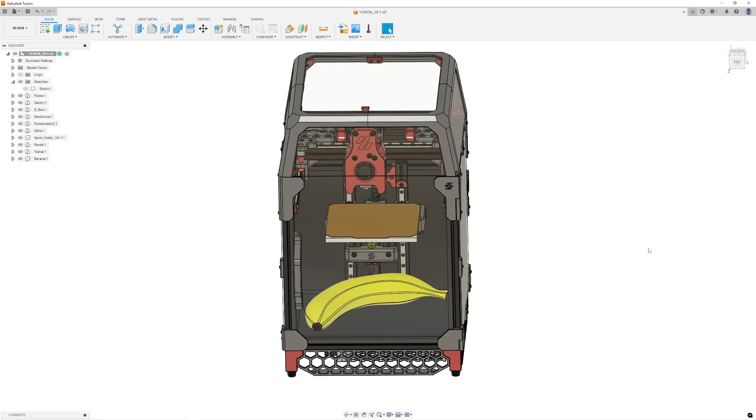So to have it in subassemblies and make it very logical for a build house or for kits or for manufacturing to be able to figure out how to assemble it, and to segment the BOM by kitting up the BOM, allowing you to find these parts very easily and build each subcomponent easily and then integrate them together by however you decide to segment the different portions of the subassemblies, where you have one start and one end. Okay, here we go.

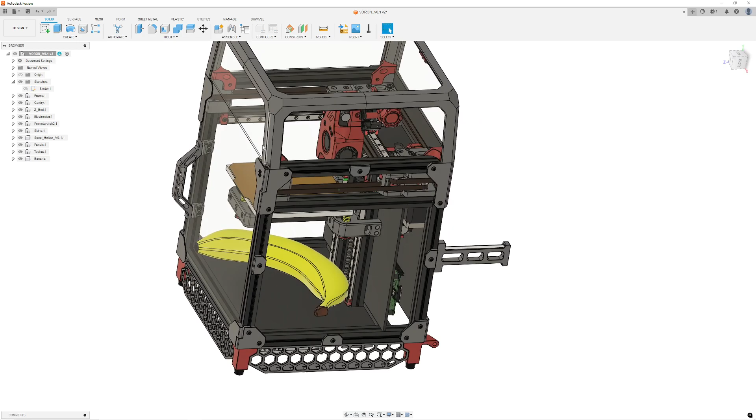Here's the Voron 0.1. This is not the latest version. I think they're on 0.2. I have one of these Voron 0.2s, and now it doesn't have this assembly like this. It's now square. It's got a square cap on it, and so it has another rail here with the lock segment. So I'm going to use the mouse in my right hand, and I'm using a 3D space mouse from 3Dconnexion on my left hand.

So let's go ahead and go over this. Pretty funny, they got a banana in here to show the size. Very, very small printer for a comparison. Obviously, you can go up here and inspect. I think it's only like 6 inches wide by 6 inches wide by maybe a foot tall or something like that. So let's go ahead and look at how they do the BOM compared to that robot arm, right?

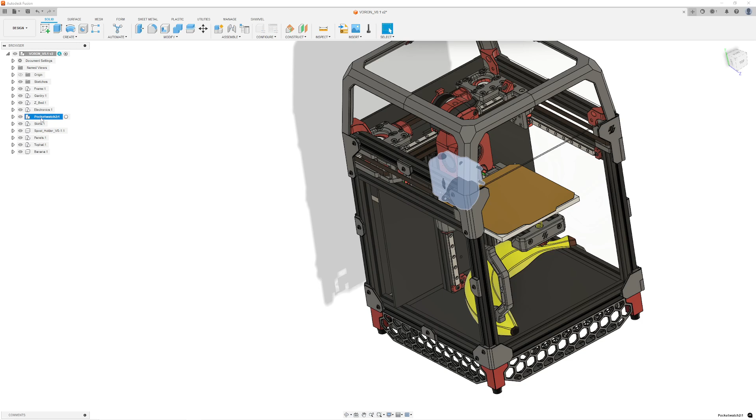So the robot arm, it has component by component. So here it looks like they're kind of doing a mix. So here we have the frame components. So this is a kit, and so they have instructions. The instructions for the kit are very, very well done. I would say that this is one of the instruction manuals that you can use as a guideline to develop your own user manual for either build, manufacturing, or however you want to do it.

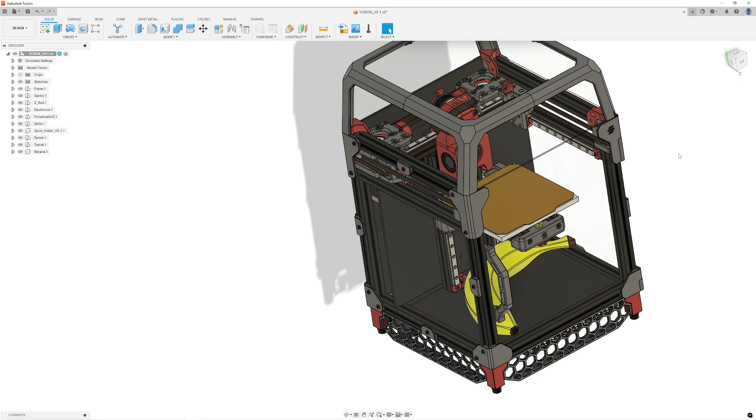So obviously for manufacturing, you're going to need to have some sort of procedure that is locked in with all the specifications, torque values, dimensions, all these things that need to be correct, as well as testing. So did it pass QA, quality assurance? Did it pass that QA testing to be certified that this is most likely going to work? And then when you ship it, the chances of you having problems come up are way less likely.

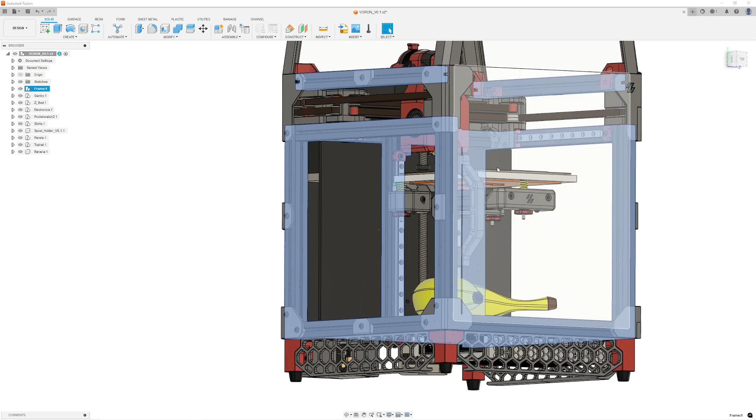So, how you build it is generally you build it by the frame, including these rails. So this is kind of step one, which is interesting on the build. And I've built mine fully, haven't got it up yet because I have a 0.2 and I believe the hot end was bad, so it died kind of instantly. So these components are generally built first, the frame, and then this back section in here is built before you close it in. So generally the frame and the gantry. And I think also the gantry is kind of built separately.

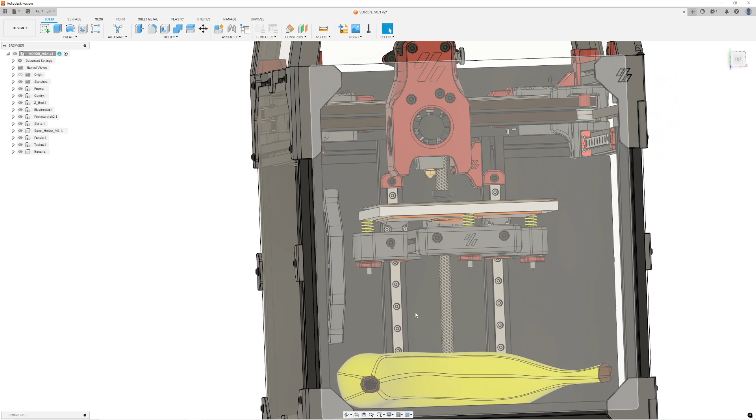Another thing that's built in here is, if you see this bolted here, the Z gantry. So I think here the Z gantry is there. And then you have the Z bed, or this is the Z gantry. And then the limit switch is up here. I think the limit switch on mine's in the bed. I can't remember. But I have the sheet metal bed, not the aluminum extrusion bed, the upgraded bed.

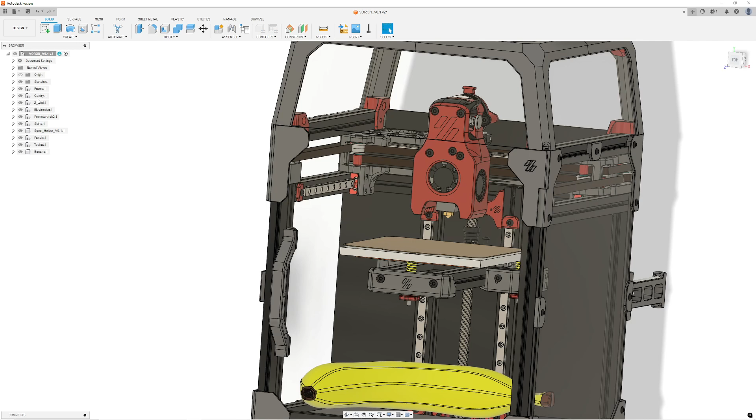So basically how they have this built is in the subassemblies. So it doesn't look the same as the arm because these things are kind of inside each other, while the robot arm is the easiest to see because it has these different links that are sequential, right? Joint 1, joint 2, joint 3, joint 4. There you go. This one is a little bit more complex, but you'll actually find.

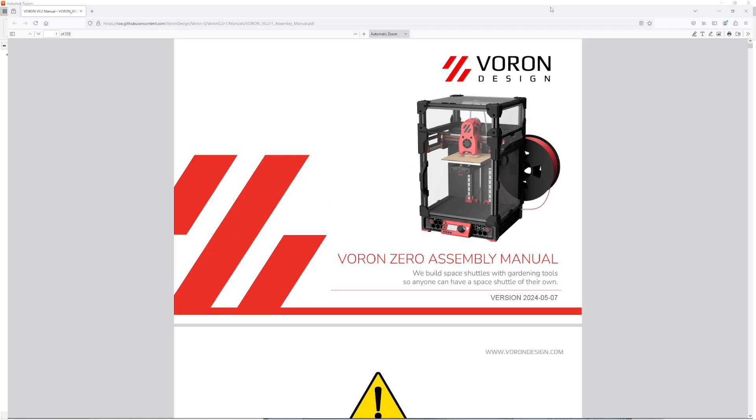Let me actually get the manual real quick. So we're going to go printers, Voron 0, and again, Voron 0.2. I downloaded this a long time ago. So let's go ahead and look and see how their subassemblies work. So again, this is a very, very good reference.

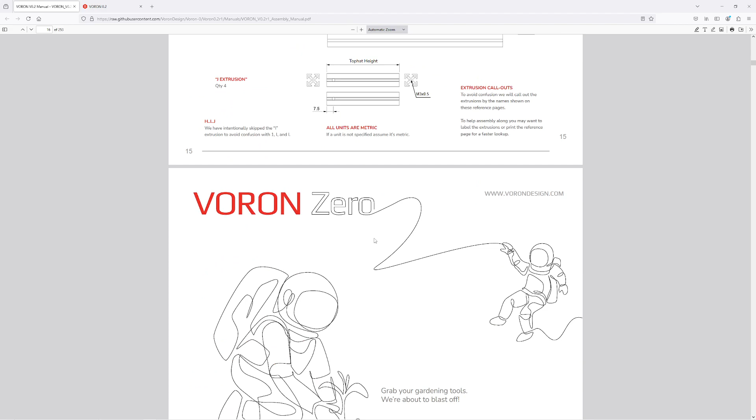Voron's website is here. You can see vorondesign.com. So here it has all the things, and you see here the very first thing. Again, this is 0.2; what we have there in the video is a 0.1. So it's showing you the subassemblies that you're going to build.

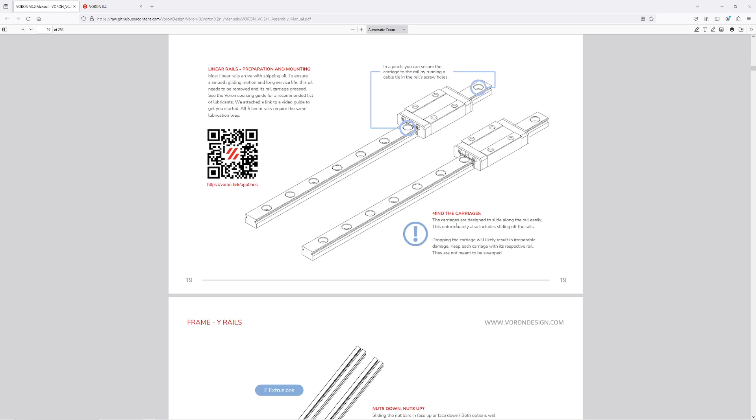So you see here you're building the frame first, and then you're building the z-axis. Now I had the sheet metal version, not this version, but a lot of these are going to be the same between version 1 and version 2. But you see here they're building the first two sub-assemblies. One is the frame and the next one's a Z bed.

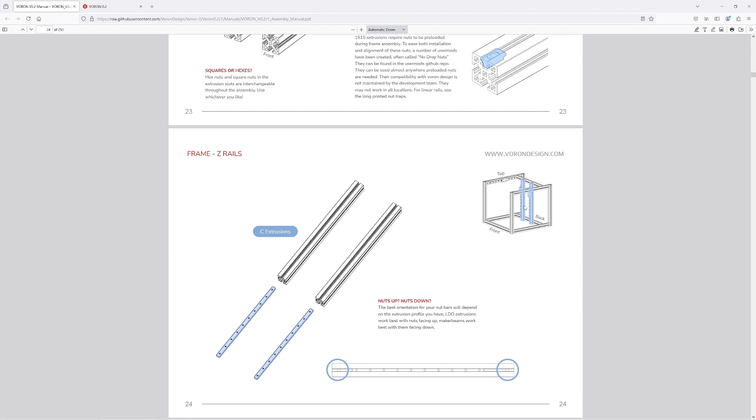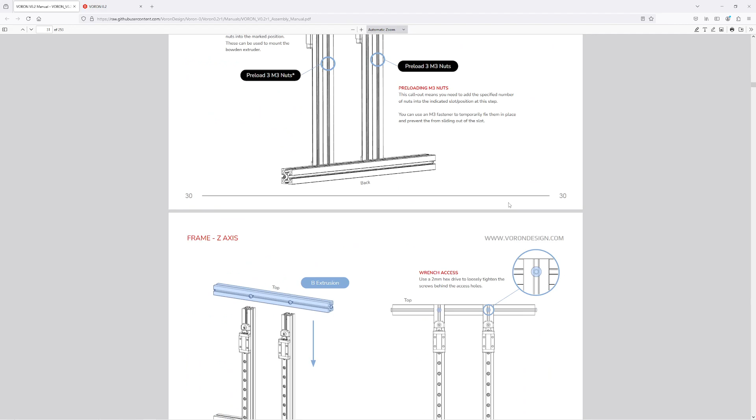Now they're kind of building them at the same time. So you see here they built the Z bed first, and then they're adding this kind of horizontal portion of the frame. So those are the two different parts that are interacting with each other. So maybe that should have been counted as the z-axis, the z-bed. And so there you go.

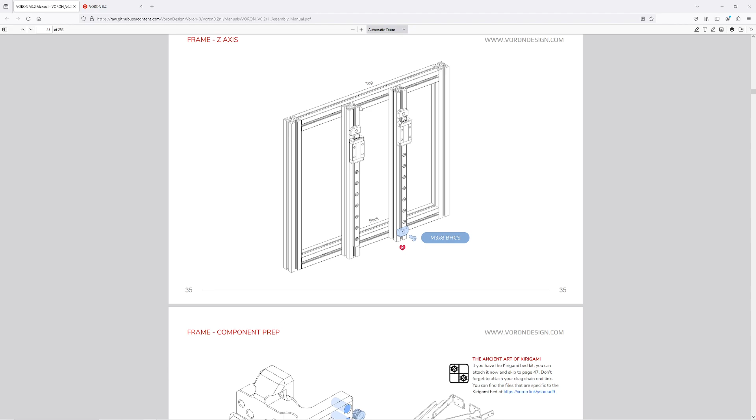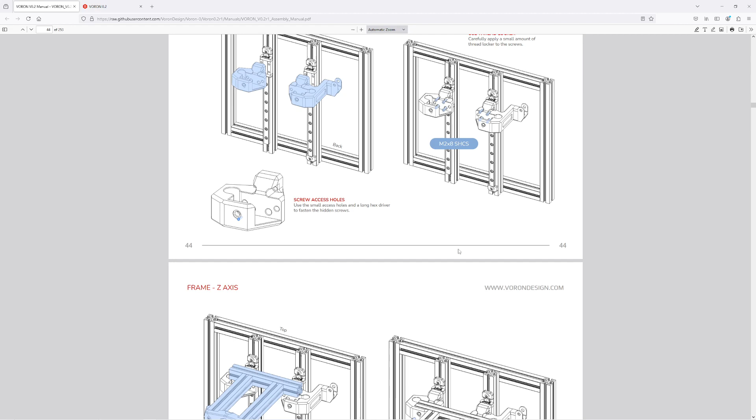Now you have a nice, good separation. Because now they're going right. So this is the one I have, the Kirigami sheet metal, this one. So now they're going directly into the z-bed sequentially. So you see the BOM is sequential to the actual assembly.

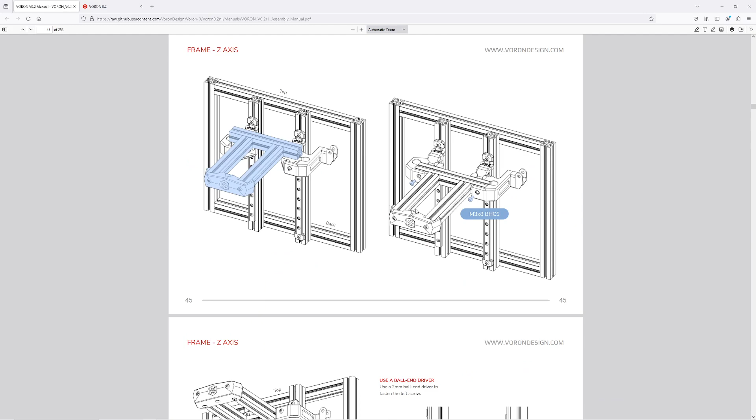And there was that one part that I don't agree with. This part shouldn't have been part of the frame. I think that should have been part of the Z bed, same as on the bottom. So you saw there, if I highlight the frame, the bottom there. So I think that should have been there. Obviously they're doing this just to call it that. So I guess it depends on how you want to segment it.

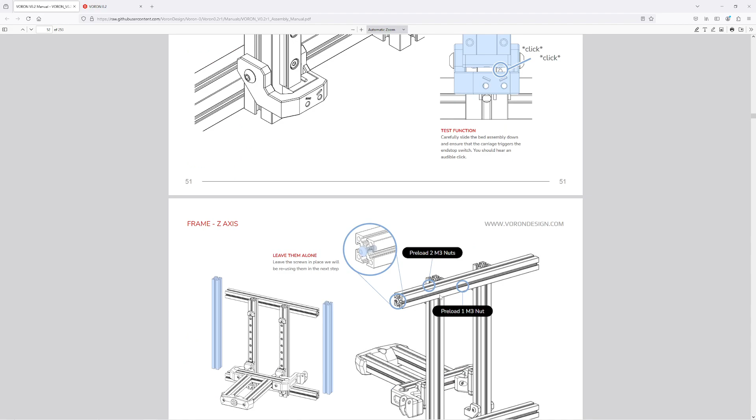If it is an open source project, this is probably better for the user to understand by doing it this way. If it was me, I probably would have combined. If it was just your team seeing it, and this model is only to be circulated internally, confidential, then I would have had this.

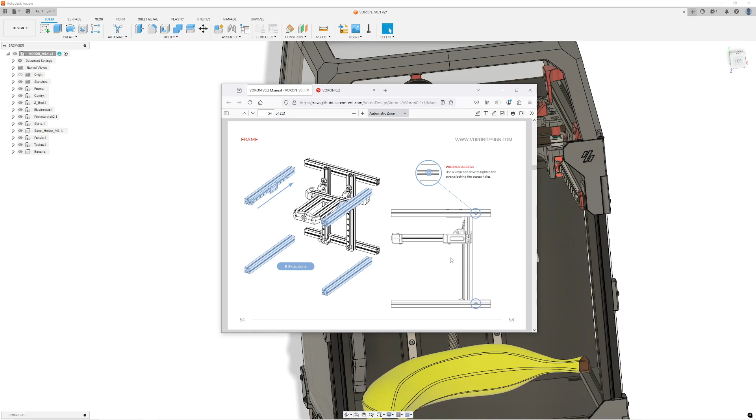I mean, here you go, right here. This is the Z frame. Frame, Z axis. There you go. The two parts are here. So it should have probably been that way, right? I mean, here's all the parts for the z-axis, and then he's adding the frame to it. But it makes more sense so that people don't get confused when they say, okay, I click on the frame, it's not all the frame.

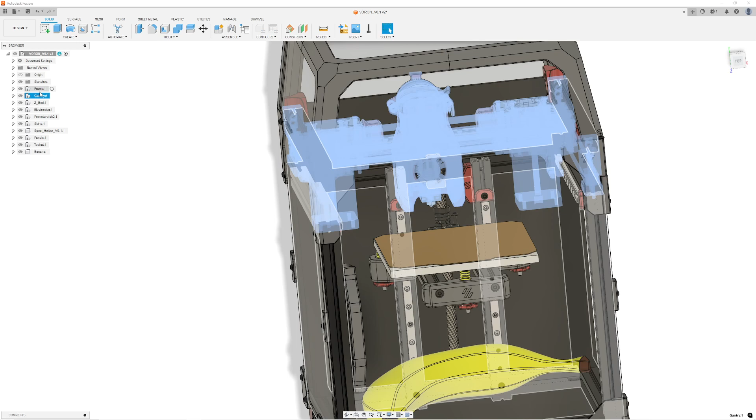I guess also how they named it, maybe come up with a different name for that. But the z-axis, maybe you call this XY axis frame, or in this case, it's only the Y. This is the gantry. The gantry is the X, and then also the gantry is there. It should have probably been this way. There you go. Now I fixed it. So frame, z-axis.

Oh, they have the bed. The bed is a separate section. Okay. I mean, if you want to do it that way, then that counts. That's a way to get out of it. So, okay, this is literally the Z frame, all the framing, and then the Z bed. Okay, so that makes sense.

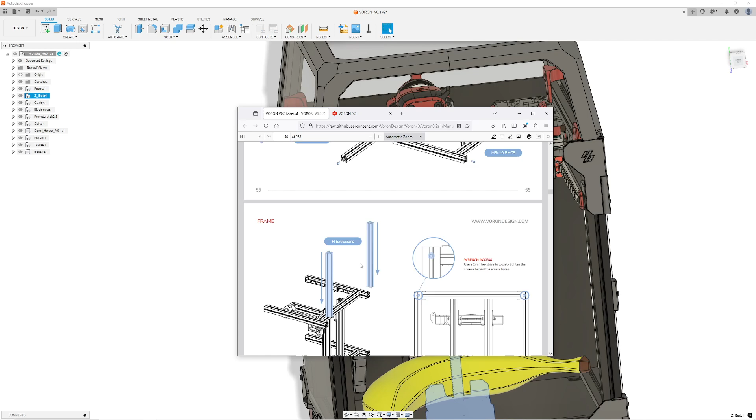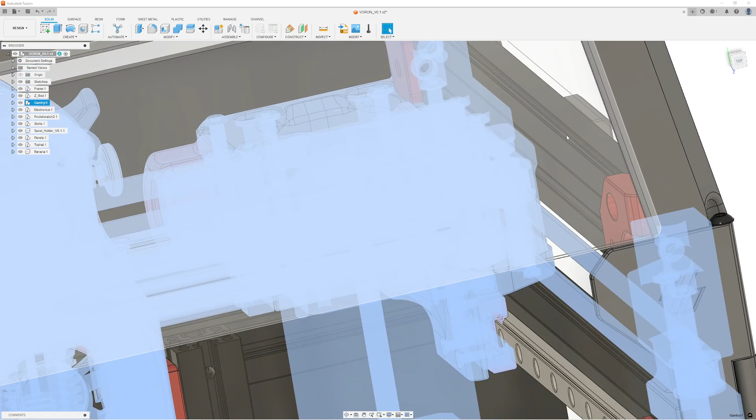So he added the Z bed on there, and now he's starting to add some of the paneling. So the paneling is here in its own kit, but you see it's kind of assembled in different segments. But we can check on the gantry, and it looks like all of the screws, so you can see a screw in here, you can see screws down here, flathead screws. So all the screws aren't in their own kit, they're inside the general kit of all the big sub-assemblies.

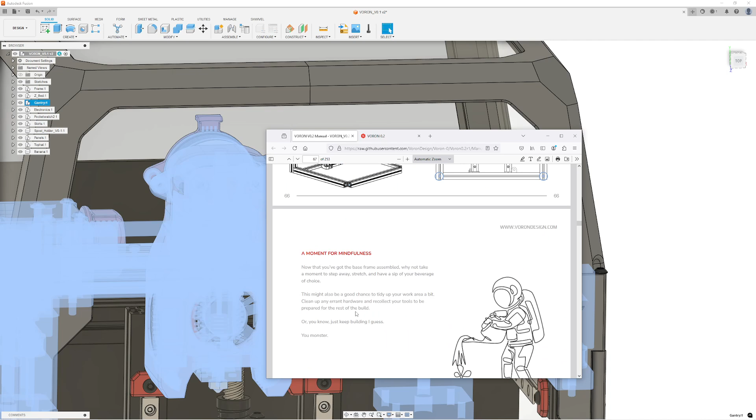So that's good. You see here putting in the paneling, and then also putting in all of the nuts inside of the aluminum extrusion. Finish building the frame, and then you start building the gantry. So here you start adding the gantry onto the frame. The Core XY motors here. It's taking the Core XY motors and adding them in.

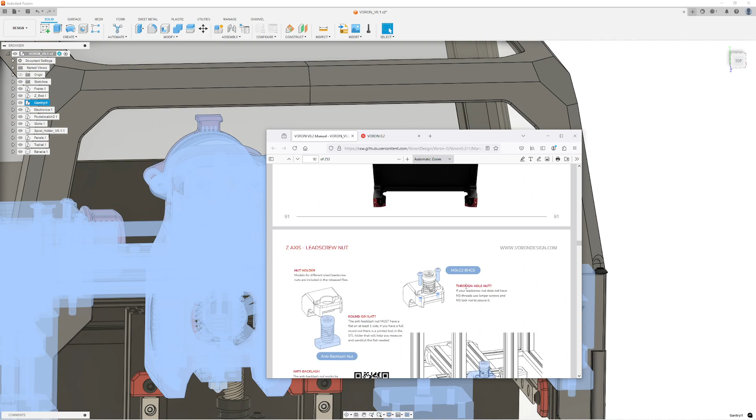This is 0.2, so you can see it's starting to diverge. The design is a little different from what we have. You can see here it has a different motor on the bottom. So here starting to add the motor, starting to add the Z-axis motor, and all of these different components. Here's the bottom foot.

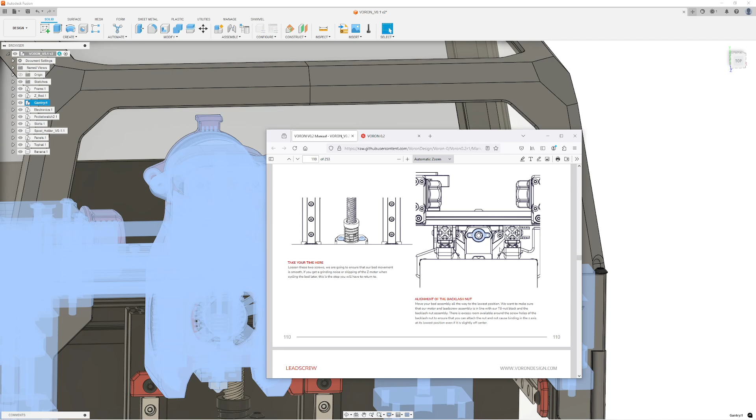So here's adding the feet to it, and then also the limit switch for the filament run out and all the caps and things like this, and then dropping the Z-axis motor in, and then the alignment screw, anti-backlash nut, and checking to make sure that the top and the bottom don't bind up. And then here starting to build more of the gantry. So you see here it is kind of going down this segment.

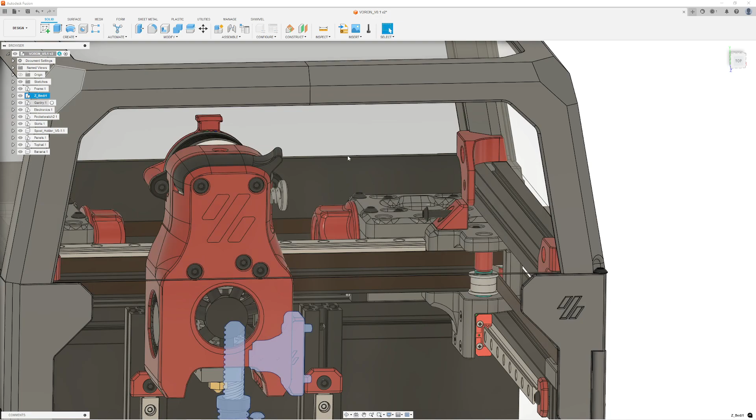Now I moved the Z bed in front of the gantry, and you saw one of the things that they did is they put this panel in before everything else, which is this panel here at the bottom. And I think it's the same here. Again, this is version 0.1 versus version 0.2, but I think it's the same for both. And then here you can see the hardware, and we saw that that's all in one kit.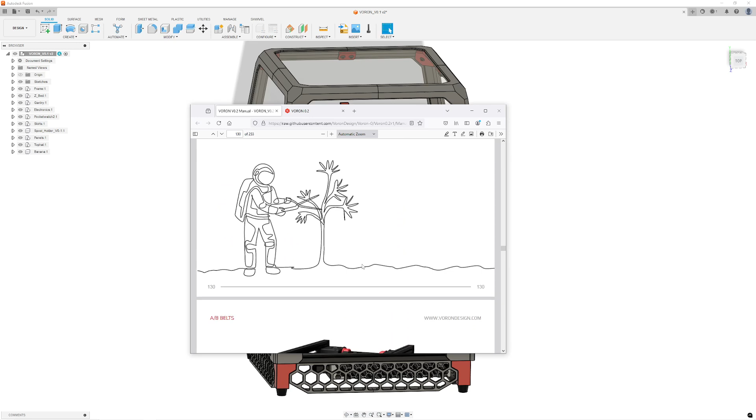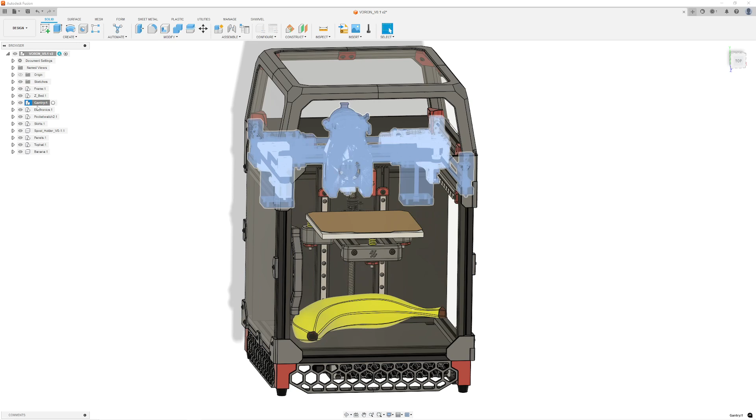And then here you can see still going through the rest of the gantry design. Okay, gantry bed, everything is there. And then here's for the actual heated bed, which is inside of that Z bed. So you're kind of going back and forth between Z bed, gantry, all of these ones. But again, it's better to have it in order.

Also, open source kit, people look back to see, hey, which ones do I have? They like to kind of be in sequential order there. It makes it easier to check the general assembly. This looks like Fusion, probably. And again, this is a Fusion file, so I believe they did all the design in Fusion 360.

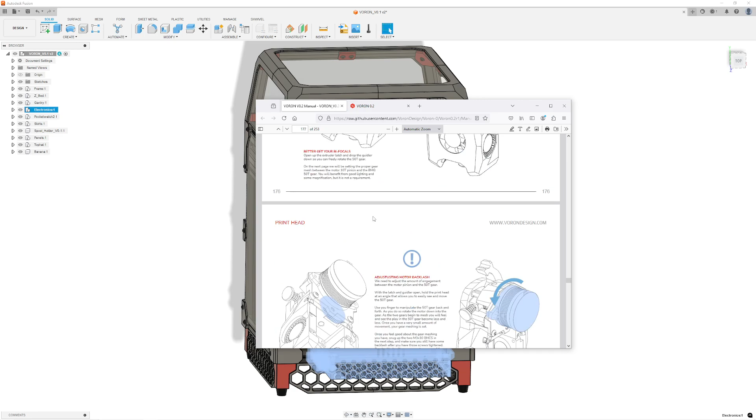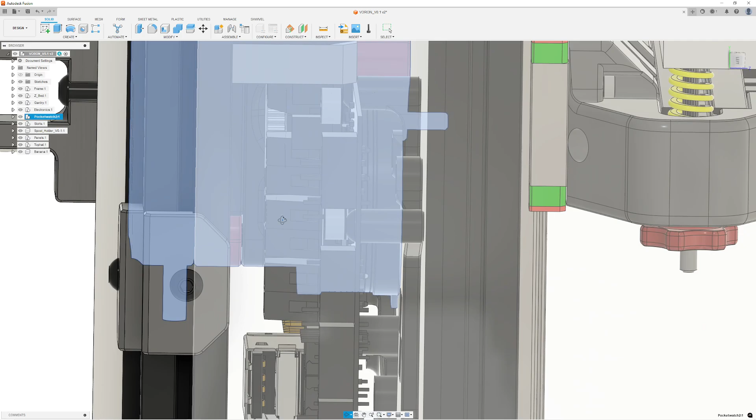Okay, so they're finishing up the hot end. And the pocket watch thing, I think, is an old thing. They don't have that anymore. I don't even really know what it is. I mean, it's some sort of Bowden system, I believe. Anyways, I don't think they're using that anymore. I didn't have it. So gantry also includes the Stealthburner or something, the name of the hot end. So all of that is included in the gantry. So they're still doing the gantry here.

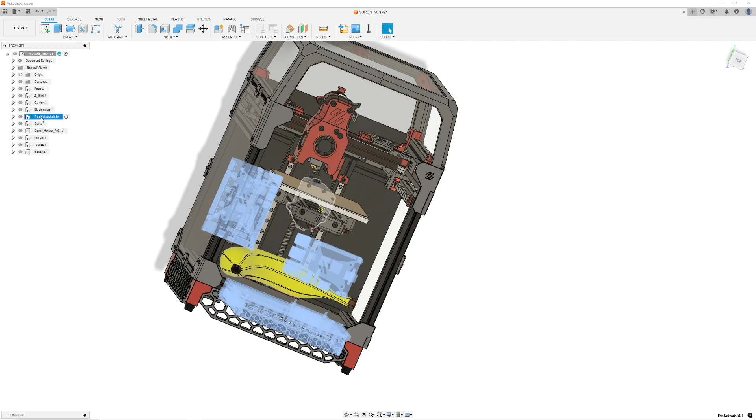Okay, so now they get to the electronics. Oh, hey, look at that. Electronics is next one, sequential. Very good. Electronics is there. Pocket watch not used. Skirts on the bottom, spool holder, panels, top hat, and then, of course, the banana. So I think the rest of this is in sequential. So basically, they're installing the paneling. Some of the paneling's already there.

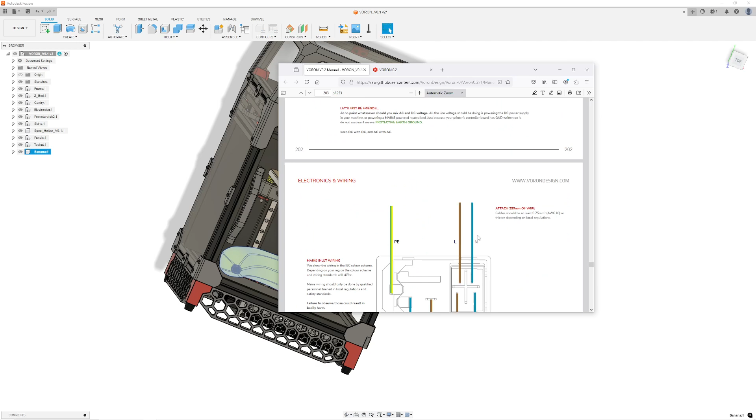And then now they're installing the cooling fans and the electronics, wiring, all that stuff, putting in stuff for the power supply, everything on the back, the motors, controlling the motors, thermistor, all of these things, the caps. And they have these little random drawings. Then they're starting to add the skirts and side panels.

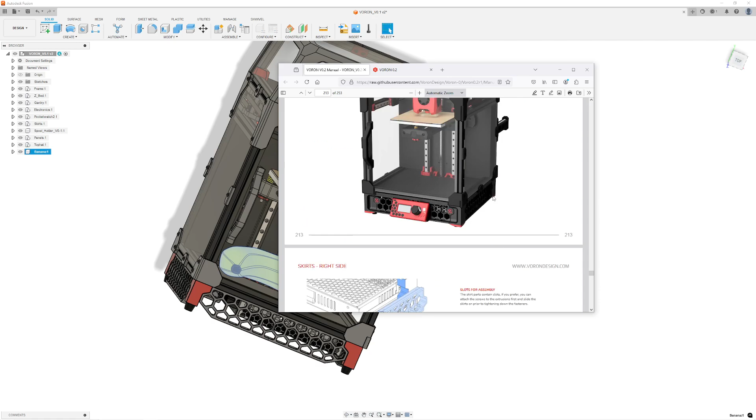So you can see the spool. I think the spool is already there, maybe not yet. So spool holder, panels, top hat, and then the skirts. So it's basically, for the most part, sequential. So everything here is sequential. Here's the spool holder. So they did the skirts before the spool holder, so you see that's sequential.

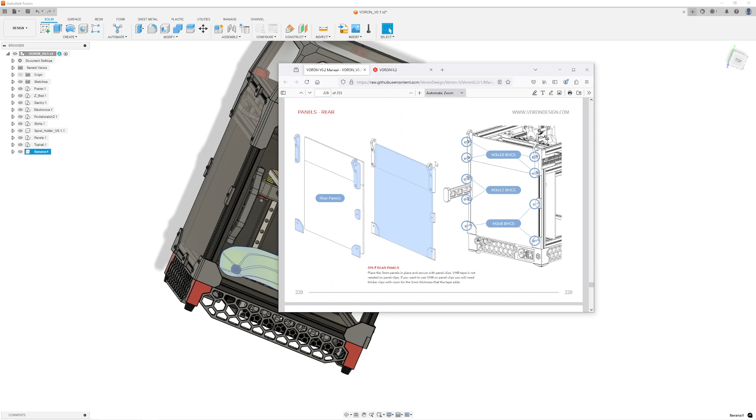And then they start to put together the Bowden equipment, put some of the paneling, put more of the paneling on. Put the slip n slide on. I never did do the paneling nor the top hat on mine because I couldn't get mine to fire up yet. So these are parts that are still pending.

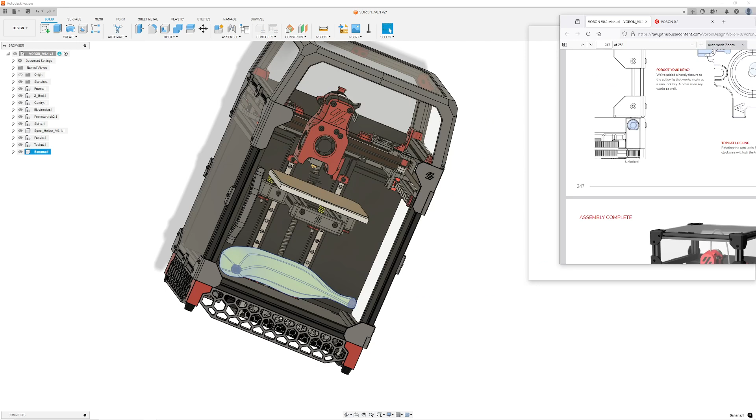Anyways, so as you can see, great manual, and I would say this is a B plus or A minus assembly here. Pretty much everything is in order. All the screws are in the different sub assemblies. So, and you can see it's a very, very flat BOM. So this is a kitted BOM. So it's not piece parted in. So it's a very, very small BOM. But if you go in here, you'll find these things are massive, right?

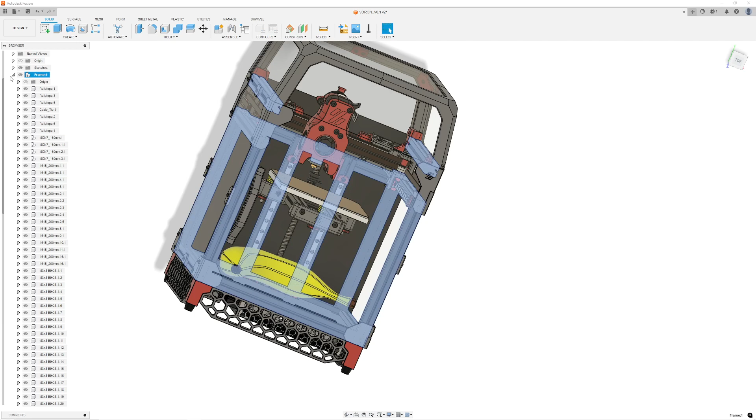And this is kind of how you want to have it. So when you go in and you create a spreadsheet of this for a bill of materials, you can have it by subcomponent. And for the subcomponent assemblies, you can have the BOM for each subcomponent, okay, and then all the things needed to build those.

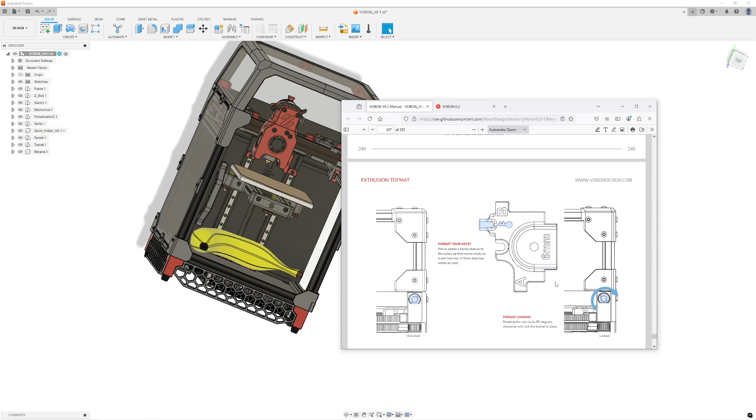Now, the only thing that is missing here compared to something like this, and actually I have it here, is you have some of these assembly pieces. So where's your, in semiconductor we call it FIF, first in fab kit. So where's your kind of parts needed to build the system, the hardware and things like that. So sometimes people don't put it inside the model.

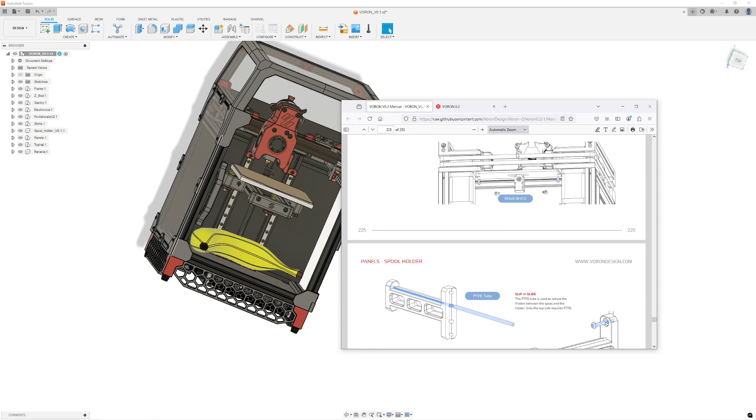Another option that you have is you can go in and kind of make things non-geometric generally. So I've never actually tried to do that here inside of Fusion. I do that at work, but maybe. So there's probably a way in here to kind of make it non-geometric so it shows up inside the model when you export the BOM, but it's not actually visible, right?

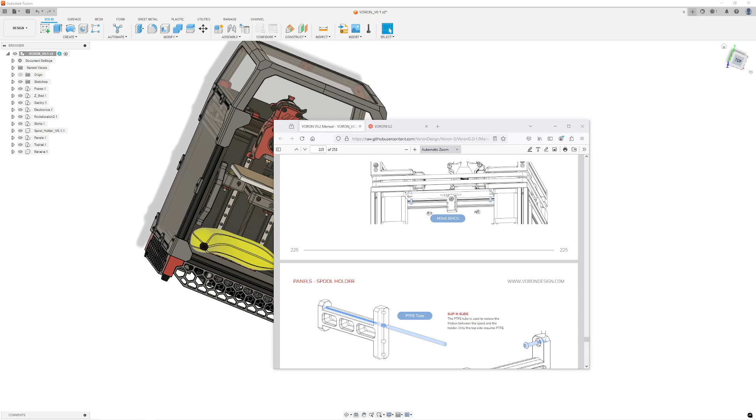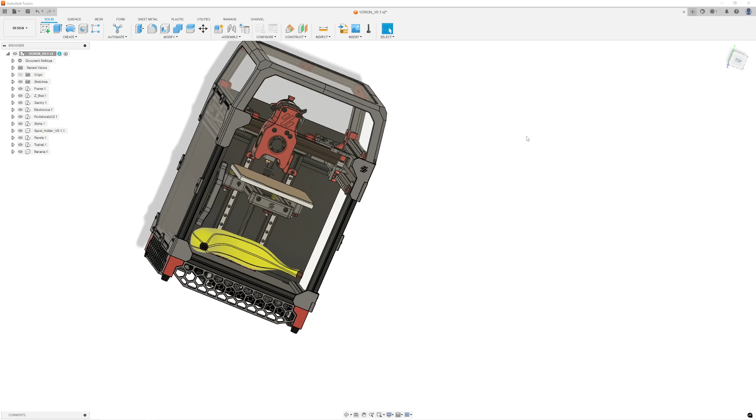I'm gonna have to look up what it's called, but in NX at work it's called non-geometric, which is it's there inside the CAD, but you can't actually see it, but you'll see it in the hierarchy here. Anyways, so have the first fab kits, the Allen wrenches, all these things in there, and so this makes it easier than an Excel spreadsheet because this is constantly updated. And then if you decide to create a new spreadsheet, you could forget it in the spreadsheet. Generally, everything is built off of the model, so it's great to have it in the model.

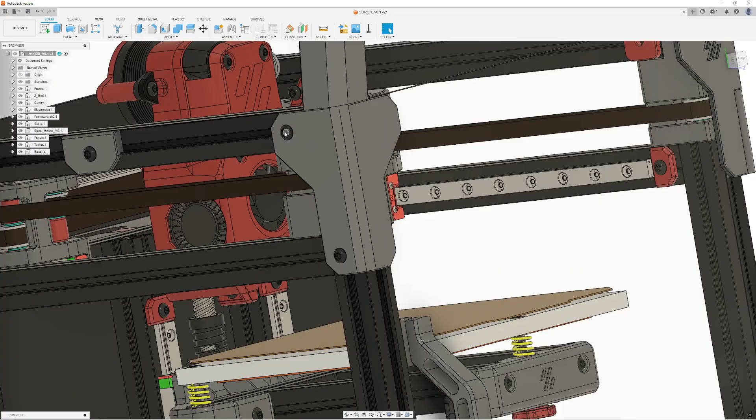Another thing that you can do if you have it in the model is you pop it in as non-geometric and check installation. So it's like, hey, I have this Allen wrench. Okay, I'm going to install this screw inside or something at some point for your assembly. Also, it makes it easier to do a virtual assembly sequence, to do a rendered assembly sequence, and to have the Allen wrench that you're actually going to give physically modeled, and show that if you install it here, you're not going to have any sort of interference of it hitting a wall, or it's actually physically installable.

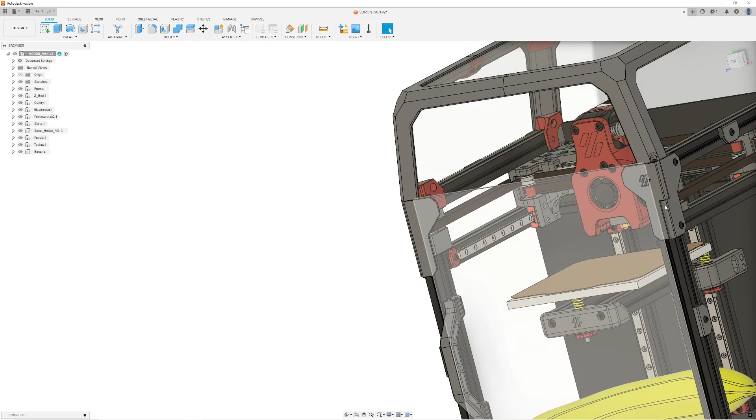So that also helps, and also to show yourself like, hey, if I get a McMaster Allen wrench, oh, this one actually doesn't work. So I need to have a special ground down Allen wrench for this installation. Or what am I going to provide with the kit, or what am I going to recommend to have in the kit? So that way you can have that in as non-geometric, and you can use it for these different types of documents that you want to put together. Renderings or animations, assembly sequence, any sort of documents, whatever. So that would be cool to have.

So reference means that it is there physically, you can physically see it, but when you export a BOM, it doesn't show up on the BOM. When you export it, it omits it. So I'm not sure if that's another Fusion option. So that's another thing to do if, hey, I want to have it in the CAD model, but I don't want to have it in my BOM. I'm doing a kit, and the user is going to have to supply all their tools. Or the tool is just there so I can easily use it to create these animations and assembly sequences, but I do not want to have it ordered for all the systems that I'm building, because I'm building it in-house. So we have our own tooling in-house, and I just want to make sure that the tooling that we're going to get and the list of the tooling that I'm going to give them is separated. So that's another way to do it.

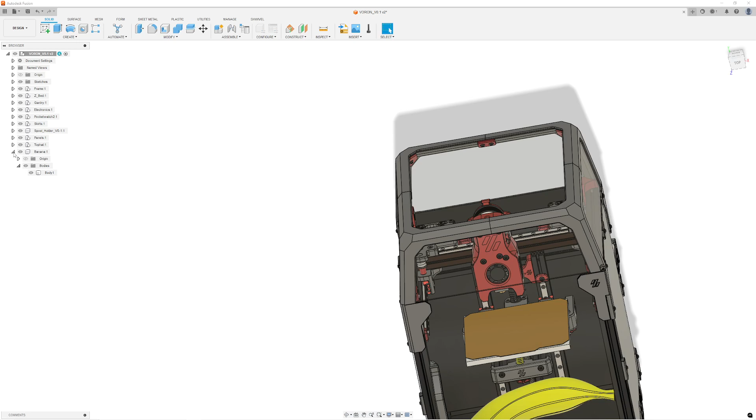Again, also another thing with non-geometric is you can just hide it. Obviously, it's another thing you can do. But when you go in here and you show all components, it's going to show up again, and you got to hide it again. So it'd be nice that if you show all the components, that that one actually stays hidden. So anyways, I'll figure out how to do that kind of non-geometric and also reference.

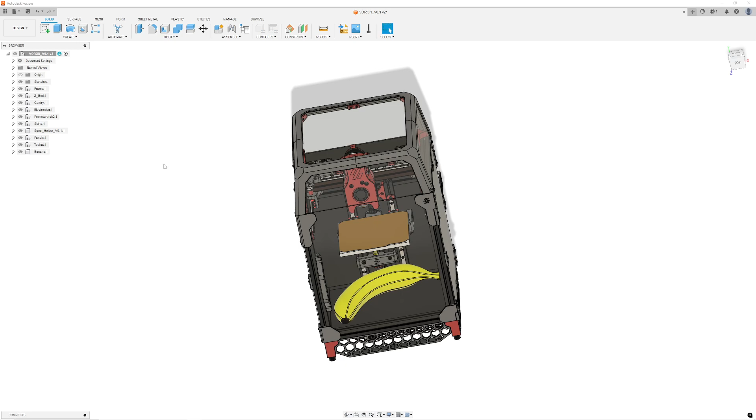Anyways, B plus, A minus for the assembly here. I would say maybe even up to an A. Overall, just very, very good. So very good assembly, very good documentation. The assembly and the hierarchy follow the documentation. It's very well compact. Obviously besides banana, I don't see any other way that you would make this any more compact.

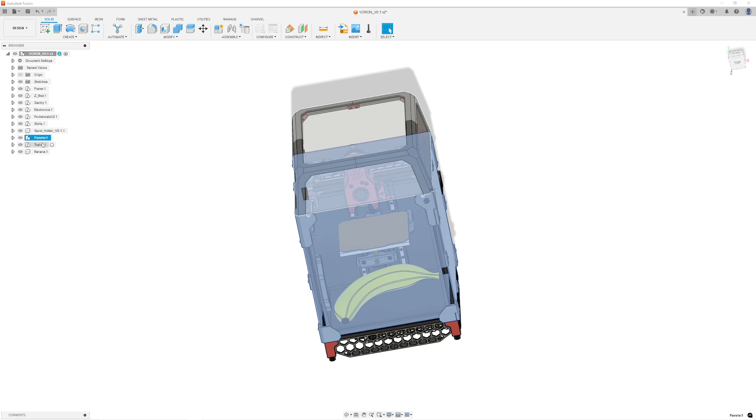The only thing that people would think of is, oh, what about the top hat? But the reason why I think the top hat is like that is so they can actually have an animation of that top hat moving. And so that's why they have it segmented that way. Overall, I would say this is a great system to reference with your own mechanical designs. Okay, let's go ahead and move on.